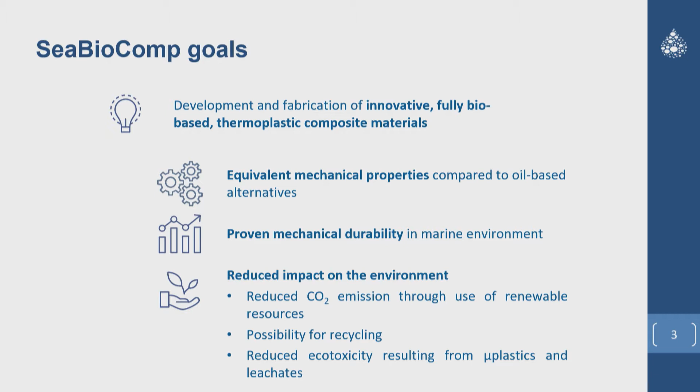Of course, we are also proud to work together with all of you as companies. So one of the goals we would also have is to make some final demonstrators, because we want to really change from a petrol-based chemistry to a bio-based chemistry. I think it's obvious nowadays, if you look at the prices of petroleum and what happens all in the world, we are very dependent on the petroleum industry, and that's something we want to find solutions for, becoming less dependent on oil, but also looking at alternative environmentally safe alternatives for composite materials.

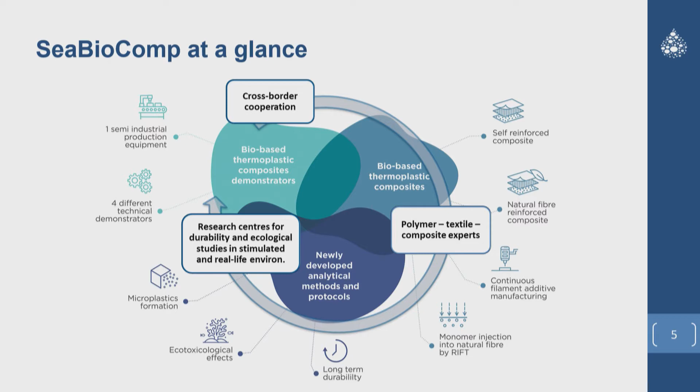This is just very briefly a glimpse of what we have been doing in the project. What you see is different methods of production, but I will not go into details, I will leave this up to my partners to further discuss.

But last, but I think not least, we want to work as much as possible together with you as industrial partners. This is just a warm welcome for all of you, after this workshop, to also reflect on the results and maybe think where in your process, in your product, our solutions could be an answer. So if you have nice ideas for demonstrators that we could also put up in the framework of this project, we are very happy to assist you and make some nice demonstrators.

So keep it open, think about it, and feel free to contact me or one of our partners after this session, and we can have a look what is possible with respect to demonstrators. Here you can find the contact details of me and also of Sarah, our communication manager. All the info is also on the website, so please feel free to contact us if you want.

This very briefly, but I think then we should continue with our real program. I would like to welcome as first speaker of today Chung Hae Park from ARMINES. ARMINES is an association for research and development of industrial processing methods, a private non-profit organization. Professor Chung Hae Park has been responsible in our project for Work Package 1, and we will present you proudly what we have been doing up till now.

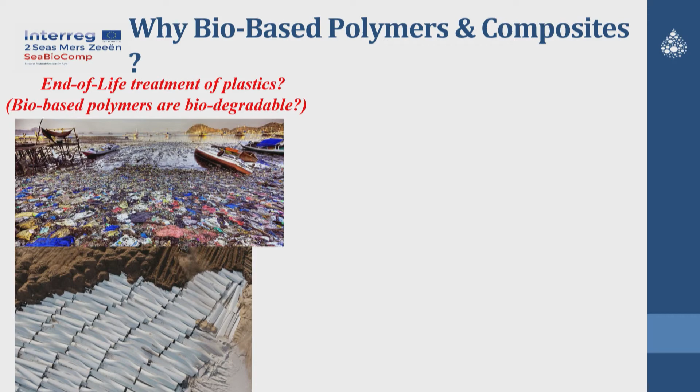So someone might say it could be interesting to introduce bio-based polymer composites, but the question is that not all bio-based materials are biodegradable. Anyhow, another advantage of bio-based materials is that it's a really effective way to reduce carbon footprint and energy consumption, not only during the service life but also during material production itself. If you compare energy consumption and carbon footprint between oil-based and bio-based polymers, you can see the benefit very clearly.

That's why we have developed some bio-based composite materials during this SeaBioComp project. We developed three different kinds of 100% bio-based composites. Our target was to achieve equivalent high performance compared to oil-based polymers and composites, and also easy manufacturing, because sometimes bio-based polymer manufacturing is very tricky.

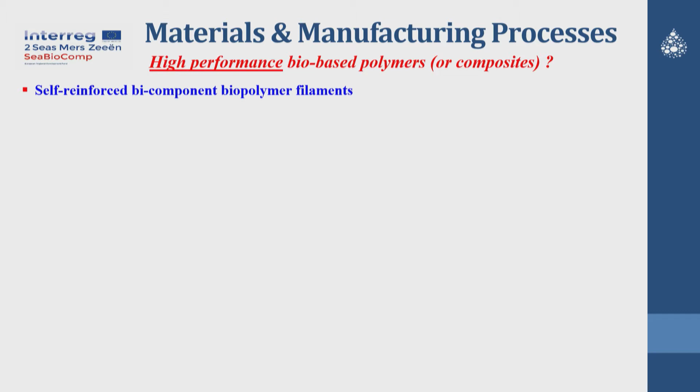The first material we developed was a self-reinforced bicomponent biopolymer filament. The basic concept is that within a single filament we integrate two different biopolymers: outside a low melting temperature biopolymer, and inside a high melting temperature biopolymer, where all the molecules are aligned in the same direction to achieve high mechanical performance. These two materials are combined into a single filament, which is then weaved into a kind of non-woven preform ready for compression molding. This is the first material we developed.

The second material adds a secondary reinforcement such as flax fibers—flax fiber and biopolymers, every component being bio-based. Due to the high stiffness and strength of flax fiber, we can further enhance the mechanical properties. This is a kind of tertiary composite with two kinds of reinforcement at the same time, and we also developed non-woven preforms ready for compression molding.

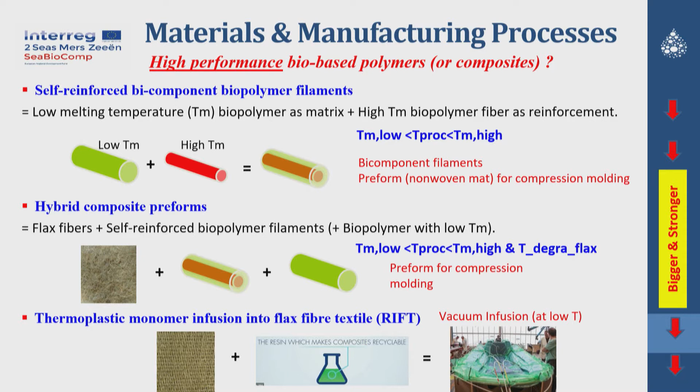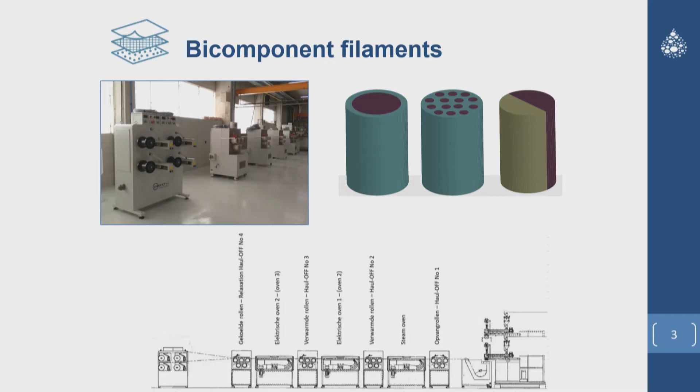For those of you who are not really familiar with filament extrusion, the line goes from right to left. On the right side you have the extruders. Here we have our high melting and low melting PLA grades in our extruders. They go through a die to get the nice core sheath structure. And then we start the production of the filaments.

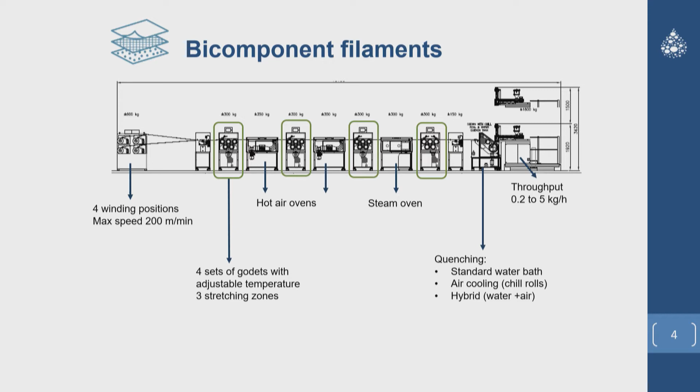They go through a water bath to cool the material. And then we go over different rolls to stretch the material. By stretching it, the polymer chains get aligned, and that gives the reinforcement and the strength of our filaments that we need in the composites.

So we did a lot of tests to optimize the materials. The first thing is that we investigated the effect of moisture. Why do we do that? Because we work with PLA, and it's sensitive to hydrolysis, so you need to have a dry PLA material before you start.

We did a test depending on the moisture content of our PLA, to see what tenacity is achievable. Here we see if you dry up to 50 ppm, which is really dry, you can get a tenacity of 32 centinewton per tex in this case. Using the same parameters, but with a material that's less dry, you see a clear drop of almost 10 centinewton per tex if you don't dry it. So for PLA, it's really necessary to dry it before you start.

So that's one of the main things you need to keep in mind when using this type of bio-based raw material. And then we started with the bicomponent filament extrusion.

There you can also choose to have different core sheath ratios. If you have a core sheath ratio from 33/67 up to the other way around, 67/33, you see that if you have a higher core sheath ratio, so more reinforcement present in your filament, then you have a better tenacity.

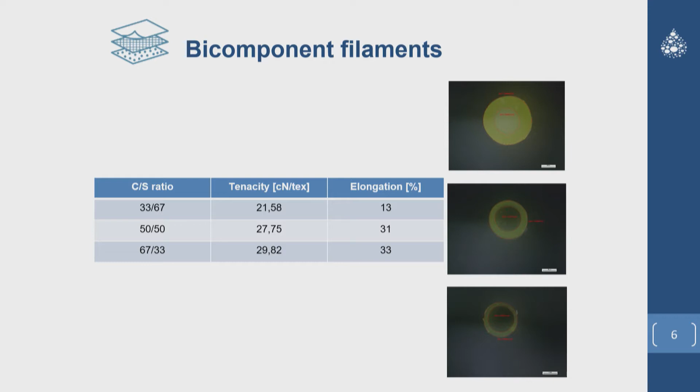You can go as high as 90/10, let's say, but then for the next step, during compression molding, the sheath needs to form the matrix. So if you only have 10%, it's not enough to form a nice continuous matrix. So you need to find an optimum between the tenacity, the strength you need, but also still be able to process it further on.

So all the other results I'm going to show you will be of a 50-50 core sheath ratio, just to start with.

So what we did is during the extrusion, you saw we have ovens, we have a water bath, we have rolls, so we can change lots of parameters. Here you can see what happens if we change the oven temperature, we change the draw ratio, but you can also change the air velocity in the ovens, the water bath temperature.

And so we did this with our PLA, and we did it with lots of different PLA grades. Here you see all the different core sheath combinations, and we optimized them to get the best results.

So you see that the combination of core 1 with sheath number 4 results in the best tenacity and the best elongation. But I want to give some special attention to the third combination. Here we tried using...

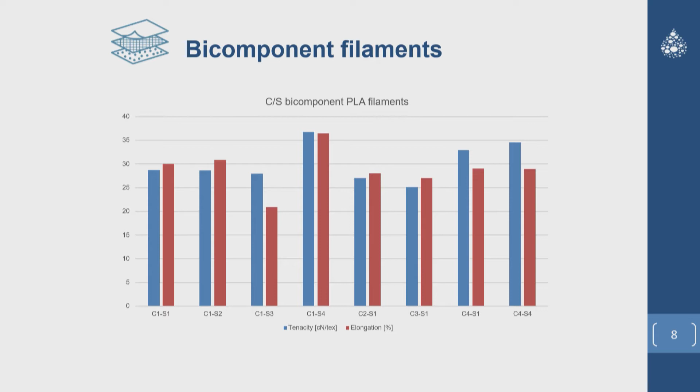But it was more difficult to process them, and if you want to make a composite out of them, you need to make sure you have a temperature window where only your matrix material melts, but not your reinforcement. So a combination of two semicrystalline PLA grades is not really possible for processing into composites. That's why the better results come from a core that's a semicrystalline PLA grade, while the matrix is better as an amorphous PLA grade.

So after improving and optimizing all the parameters and the PLA grades we used, we need to go to the next step, because with just some filaments, it's really difficult to go to a composite. At lab scale, we wind it around a frame, and it's quite easy, but in a production environment, you of course want something easier than manually winding it around a frame.

So the next step is of course to make a fabric. Here you can see them during production. On the left side, you have a picture of a twill 4-4 structure. On the right side, we have more of a unidirectional fabric. It depends on the application you want, whether you want the strength in one direction or you need it in different directions.

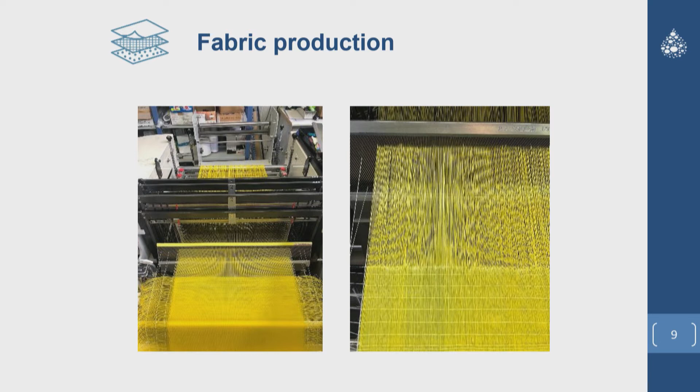You can just take the kind of fabric you prefer, and then you can stack them to optimize the strength in the direction you want. But here we had two main problems.

The first thing is this is quite a difficult filament to work with to produce the fabrics. It was a bit too hard to work with, so we need to optimize it to be smoother to use during weaving.

And the second thing is we made three different fabrics: a twill 2-2, a twill 4-4, and a unidirectional one. With the twill 4-4, we saw that during the first lab trials to make a composite, we had some shrinkage of the material.

And there were two ways to solve it. The first one is to go back to your filaments and include a relaxation step during the processing, so the shrinkage is already less.

A second option is to include a thermofixation step, where we put our fabrics over a frame to fixate them, and then just a small moment, not even a minute, at 80 degrees, and the shrinkage is then way more limited and easier to work with.

And that's how we get to the self-reinforced fabrics, so we can use them as a preform to make a composite. Thank you for your attention.

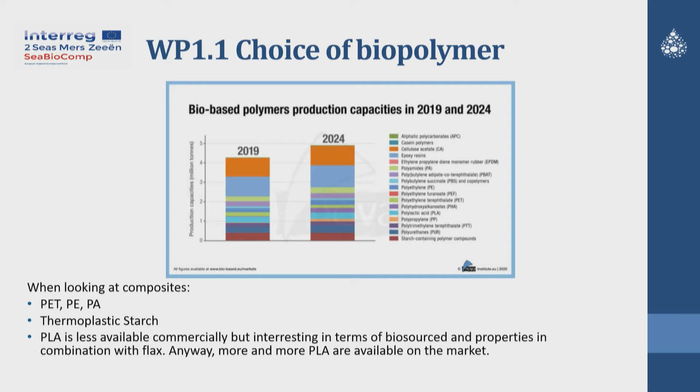PLA, even for non-woven. For non-woven, polyamide and polyester could be a problem due to temperature and degradation of natural fiber, of course. But as we have developed many things, I will go through.

First of all, melt spinning tests, of course. So I put some results about different polymers. For those who were here, they have seen the melt spinning line - a 3-component melt spinning line, which allows us to make different cross sections, different mixing of components, up to 3 components mixing.

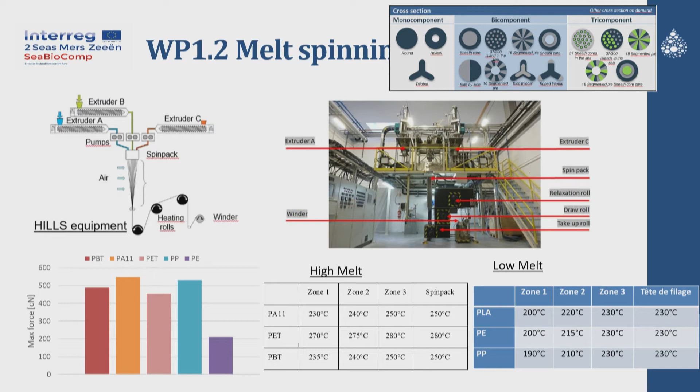So there, firstly, we tested several polymers which could be biosourced or not. What's coming out from this study in melt spinning is polyamide 11. If we talk about melt polymer, polyamide 11 could be the best solution in terms of tenacity. And PLA was quite difficult to process.

But PLA, of course, is quite compatible with natural fiber, so you will see after that in a different process it will be better.

We focused first on high melt and low melt, but after making this study, we tried to mix different polymers which can be considered as high melt or low melt polymers.

So we tried different ratios, 40-60, 60-40. You have the results here in terms of tenacity and elongation. It's complex graphics, of course, but you can see the tendency.

So we tried core-sheath/islands-in-the-sea structure in melt spinning, and what appears from this study is firstly PA11 with bio-PBS seems to be one of the most appropriate couple of polymers. But not only that - what we have also seen is quite a difference in the structure.

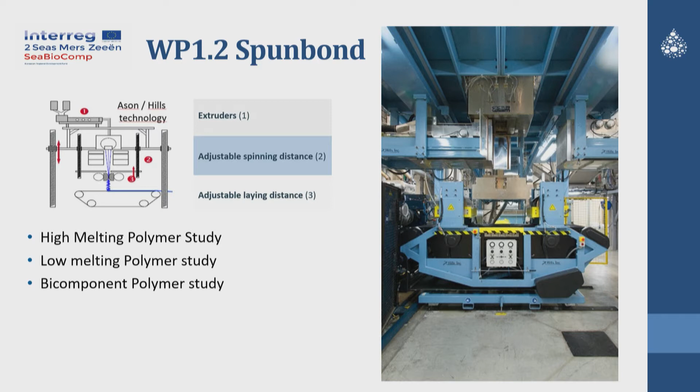And we have done the same study as in melt spinning - we tried to study high melt, low melt, and bi-component structures with the same strategy. First we tried, without going through all the study, high melt and low melt, and developed a first grade considering polyester as high melt and PLA as low melt, because there are different temperatures. You have the results here.

What we observe is that PLA chemistry could play a role, because you see two different PLAs used, 6202 and 6100, and you see clearly there are some differences in tenacity, in normalized strength. We normalize strength by testing in both directions of the non-woven, so we clearly see the strength of the whole non-woven. This is the goal of normalized strength, and we clearly see that PLA chemical structure could play a role there.

So we try to complexify the study a little bit, because we move to several different couples using PLA high melt, polyester, PLA low melt, and try to combine everything. So you have all the results here. We try different cross-sections also, sheath-core and islands in the sea. But you could see also the tendency.

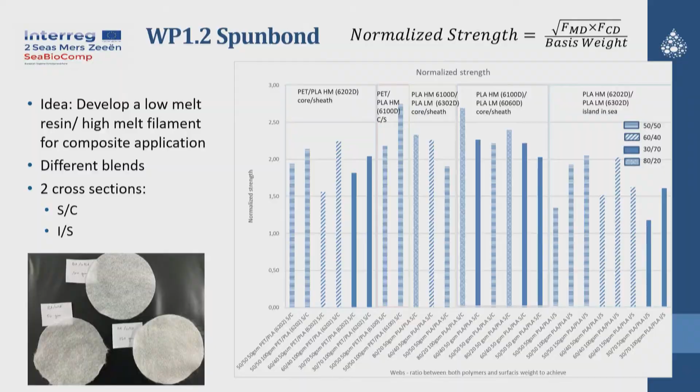So now we move again to another part, which was task 1.3. Then we try to implement also - before you have high melt, low melt. High melt is a reinforcing fiber, low melt is a resin, of course, and we try to implement natural fiber inside. So we use another strategy, which is carded non-woven.

So we try first to choose the best fiber. So you have here the composition of natural fibers, and if I could compare natural fibers to something, I would definitely compare it to composites. So telling that cellulose is the fiber, hemicellulose is the link between fiber and resin, and pectin, lignin or wax could play the role of resin. So if you consider this as a composite, you will see that more bond you have, or more fiber you are, stronger is the composite. So it's the same in natural fibers.

So if we have a look at properties, you will see clearly that the fiber which has the most cellulose or more hemicellulose are the stronger fibers - so flax, hemp, and at the second level, jute or kenaf. So that's why we choose flax, of course, as the natural fiber for hybrid textile used for composite.

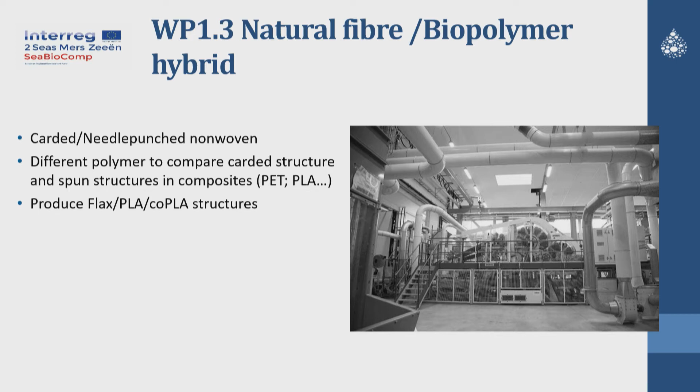But we try also flax PLA and co-PLA mix to deliver for composites. But here what we will see is not composite results, but textile results. So we could see already what is available on the textile. So it's always the normalized strength here, and we clearly see that a good ratio of fiber is 60% PLA and 40% flax.

But with the results that we have developed also with ARMINES, we have seen that we have to add other components, such as low melt composition, that could play a role in elongation. So that's why we try to manage also elongation - not us, but ARMINES tried to add some low melt fiber, low melt components to add elongation without disturbing the tensile strength in composites. Here it's always on textile. So we try, that's why you have this table, to manage the good ratio of fibers and flax.

I will go quickly on another part of textile composites, which is just reinforced polymer. So we try to manage also short reinforced fiber compound or long fiber reinforced filaments.

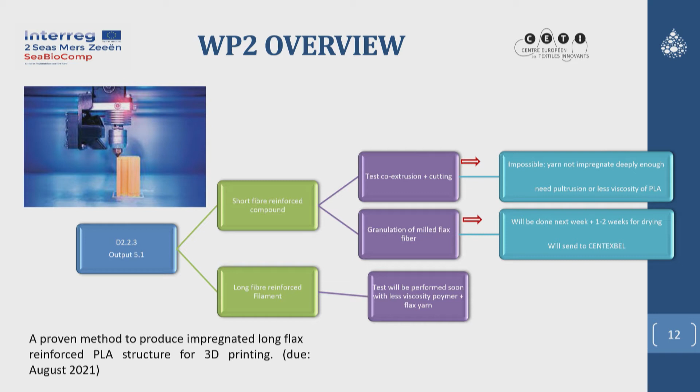So what we do is co-extrusion into a 3-melt spinning line, just to make a filament that will be available here. I will try to share with the assistance to show you spun bond, what is a carded non-woven, what is a filament. So we do a co-extruded yarn coming with a yarn from Safilin. We thank Safilin for helping us on that.

And we coated the yarn with the PLA to try to make compounds or to directly make 3D printing, but unfortunately, the limitation was a low pressure, so we were not able to commingle very deeply PLA in flax. So the cutting was a disaster, and I believe 3D printing will also be a disaster.

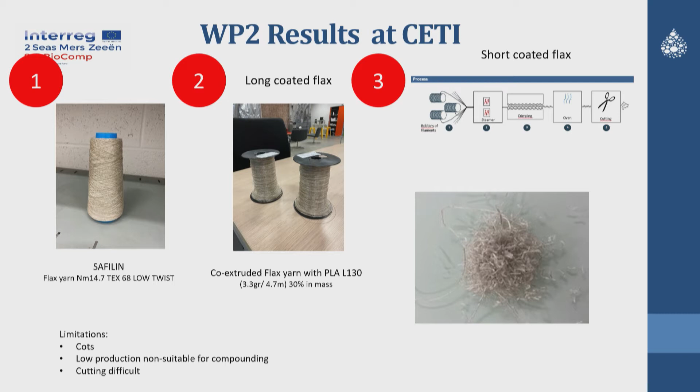So we tried to move to another solution, which was to granulate flax fibers so it could be very dosable into a compounding line and try to mix directly with the PLA.

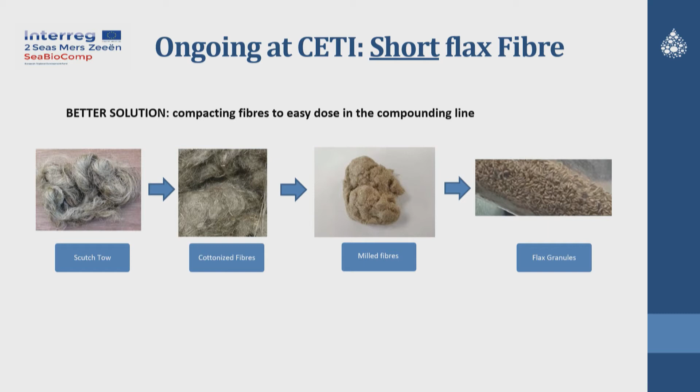Just a short introduction on what is going on now. We try to manage also recycling through different axes, because the spun bond is made of synthetic fibers and the carded non-woven is made of fibers. So we try both routes, which was mechanical recycling and thermomechanical recycling, and the tests are ongoing now.

Just I was expecting to have some questions, but we will see after. So I thank you for your attention, and we will see after for the questions.

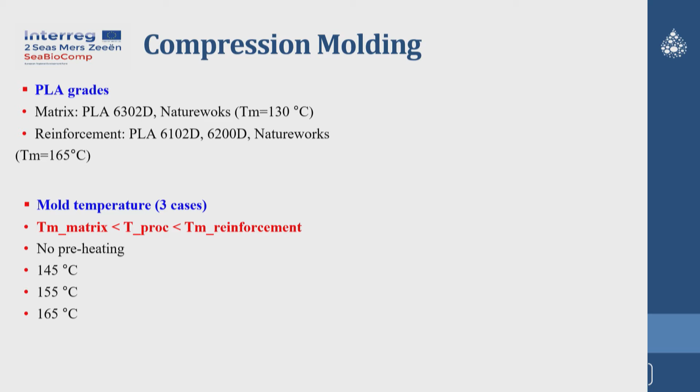Moreover, what was interesting in this project was that all these preforms didn't need preheating or pre-drying. So manufacturing is relatively easy because we didn't need pre-treatment of the material.

In terms of compression pressure, we adopted a kind of staged compaction — starting from low pressure and increasing the compression pressure sequentially, because in compression molding one common problem is excessive lateral squeeze flow, which can cause loss of a lot of matrix material. Anyhow, we also tested the conventional compaction cycle with constant pressure, and it works too.

The first material we tested is self-reinforced PLA. We tested two different kinds of filament with two different cross-sections. The first one is core and sheath, shown on the top left figure. The second one is islands in the sea, where very small, high-melt PLA is embedded in low-melt PLA.

As a second comparison, we looked at two different non-woven technologies, dry-laid and spun-bond. So we compared the two cross-sections and the two non-woven technologies. According to temperature, you can see the results: flexural modulus on the left graph, flexural strength in the middle graph, and on the right, the failure strain.

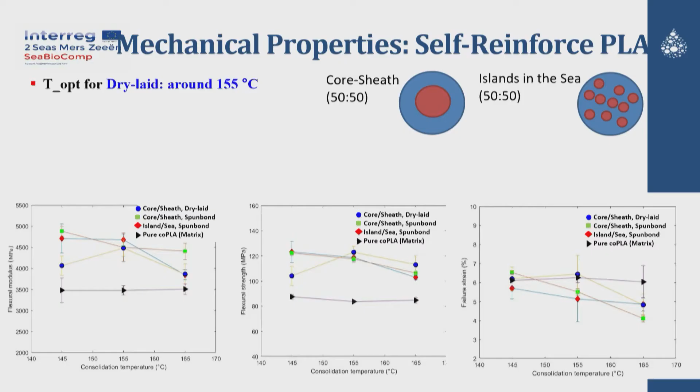And moreover, the optimal temperature was around 145 to 155 degrees.

You know that the most common composite material for compression molding is sheet molding compound, based on glass fiber and unsaturated polyester. For this SMC material, the processing mold temperature is around 150 — exactly the same processing temperature. That means you can use the same equipment and the same mold for this material.

In terms of comparing the two different nonwoven technologies, we found that spunbond is a little bit better because the process window was a little bit wider. We observed no difference between core-sheath and island-in-the-sea. So anyhow, we could increase modulus and strength without compromising failure strain and ductility. So we could obtain stiff material, strength material, and at the same time it is also ductile.

If we tested, the flax-PLA-coPLA composite is a kind of tertiary composite. We have two reinforcements in the same material. Flax is the first reinforcement and PLA is the second reinforcement, and coPLA is the matrix material. And maybe you can ask, why do we add the secondary reinforcement?

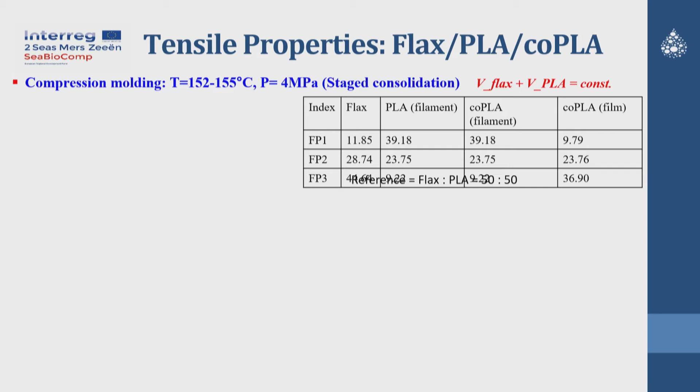So we compared. We keep the same amount in terms of volume, flax plus PLA, and we change the relative ratio between flax and PLA. In this table you can see FP1, 2, 3. In all these cases, flax plus PLA volume fraction was 50%. In this table we showed the mass fraction. And we compared mechanical properties.

You can see on the left graph, the left 3 dots are the results of flax, PLA, and coPLA. On the right, the first dot represents the result of a flax and PLA composite, where PLA in this case is the matrix. So maybe you can find some commercial grade flax-PLA composite in the market. You can see that compared with the conventional flax-PLA composite, we could increase modulus and strength, and we could almost obtain the same tensile failure strain.

So the result shows that with just a small amount of self-reinforced PLA, we can greatly enhance the mechanical properties. We can conclude this kind of tertiary composite is better than the binary composite of flax and PLA. And if we measure the flexural properties, we could obtain almost the same conclusion.

Especially you can see the third graph. The first 3 dots are flax, PLA, and coPLA, and the last, 4th dot, represents the result of flax and PLA. We could improve greatly the ductility because we added a small amount of PLA reinforcement. This contributes greatly to enhance the ductility of the material.

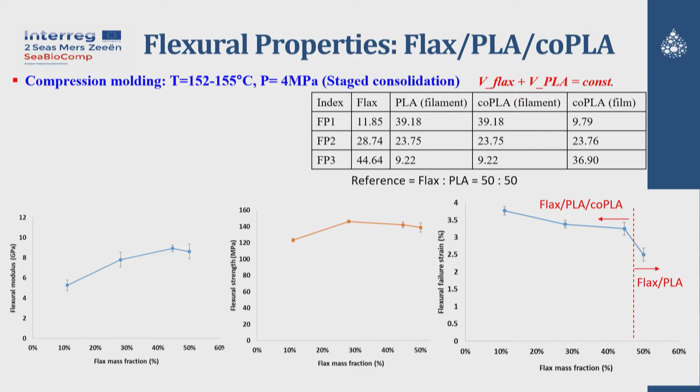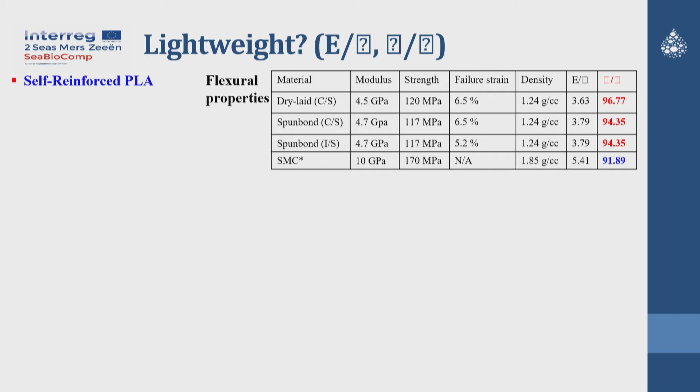And if we take a look at the result of flax, PLA, and coPLA, you can see that specific strength and specific stiffness, both tensile and flexural properties, we could increase greatly specific modulus and specific strength. That means if we employ these flax and coPLA materials, we could reduce up to 50% of structural weight compared with conventional SMC. So this is a really big advantage. We can use bio-based composite, we can reduce the carbon footprint, and we can decrease the structural weight.

And the question is about manufacturing feasibility, especially for complex part molding. In general, the big challenge of compression molding is to manufacture with a deep draft angle with a corner, where we can frequently observe wrinkles and low pressure applying applications.

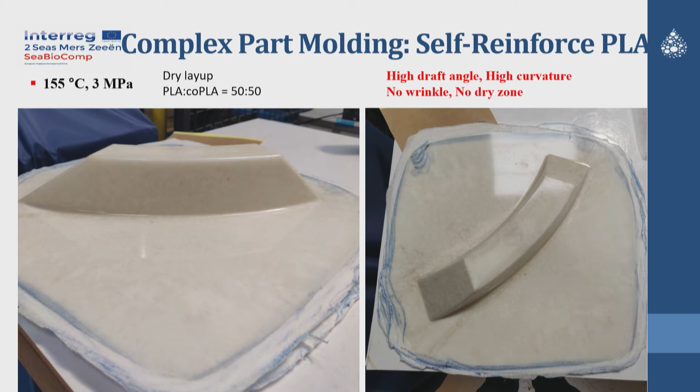This is the result of compression molding using the self-reinforced PLA, the nonwoven prepared by the dry-laid process. You can see there is no dry zone, no visible void, and no wrinkle. So manufacturing was quite simple. We just used the same mold and same compression molding press as for SMC manufacturing, and you can see the temperature range and pressure range were exactly the same as the SMC compression molding. Also for flax, PLA, and coPLA, you can observe the difference in color due to the flax fibers.

So anyhow, without any special treatment or pre-processing, no wrinkle and no dry zone, we could obtain perfect manufacturing quality using this process and materials. So we can say that we developed two different kinds of 100% bio-based composite preforms compared with the conventional SMC.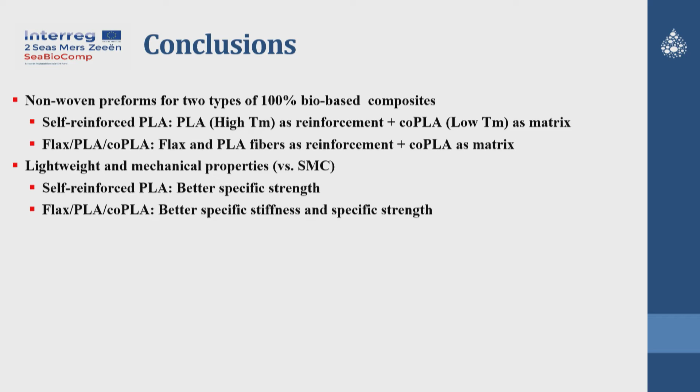We could obtain significant weight reduction, and we can use the same equipment and same mold as for SMC. We don't have to develop a new mold or new manufacturing equipment. The manufacturing cycle time is a little bit longer than conventional SMC compression molding, but nevertheless much shorter than vacuum infusion and VE-RTM.

Due to the proximity between reinforcement and matrix, because we implement the matrix and reinforcement in the same filament, the impregnation path was relatively short, and we could obtain excellent impregnation quality. Void volume fraction was lower than 2%, which is almost aeronautic part grade.

In terms of drapability, we obtained no wrinkle formation, so this non-woven preform has excellent drapability. We are expecting, though we haven't tested yet, that this kind of non-woven preform will have excellent impact resistance because it has good ductility and good toughness.

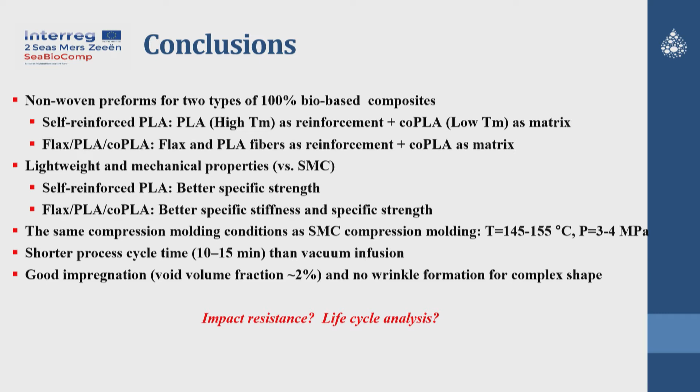And we are supposed to do some life cycle analysis to prove that this material can really reduce the carbon footprint eventually. So thank you very much for your patience.

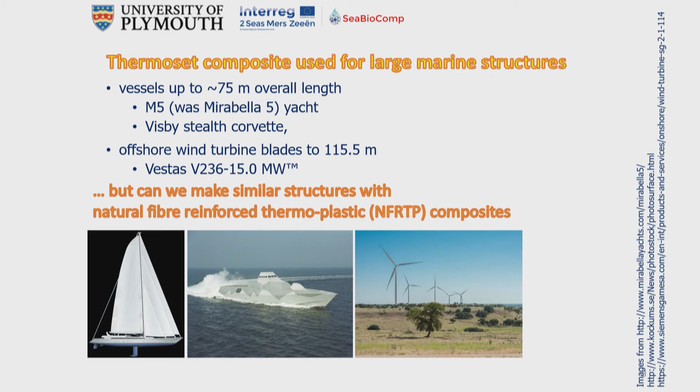This is the project that we're based within. Fundamentally, there are some big composite structures out there, things like M5, the luxury yacht, the Visby stealth corvettes, and offshore wind turbine blades, which are of the order of 75 metres for the ships and 115 metres for the wind turbine blades. Processing thermoplastics at that scale is not trivial. So can we make similar structures using a thermoplastic matrix?

It's certainly not something you're going to build a compression mould to do. Why would we want to do that? Because we're trying to make a sustainable composite. There are all the advantages we get from natural fibres and some disadvantages. And if we have a thermoplastic matrix, then it becomes recyclable and we have the potential for high impact resistance.

So in resin infusion under flexible tooling, also known as SCRIMP, VARTM, and about 50 other different abbreviations, we make a stack of fibres, cover it with release film, add a flow medium above that, and then close it in a bag. Then we flow the resin, which becomes a thermoset matrix, into the mesh to produce the composite by drawing a vacuum into the bag and allowing resin to flow down the pressure gradient.

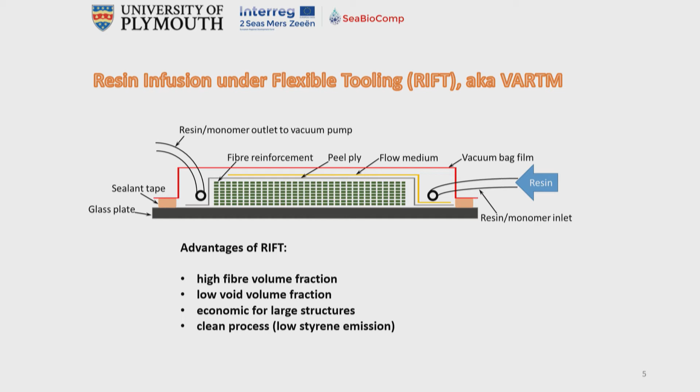The advantages of RIFT are we get a high fibre volume fraction, a low void volume fraction. It's economic for large structures, whereas trying to make a mould tool and keep it together for resin transfer moulding would be extraordinarily expensive. And it's a clean process compared to hand lamination, which has been used for some of the largest structures in the past, because it encloses styrene in the bag, if we're trying to do it with unsaturated polyester resin.

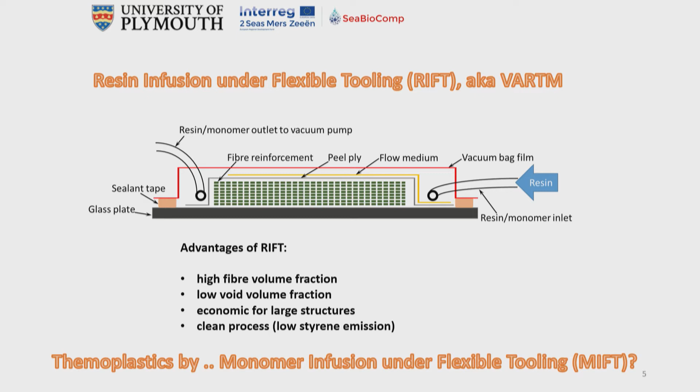But thermoplastics, the melt viscosity is far too high to get it to flow in an infusion process. But if we start from the monomer and make the polymer at the same time as we make the composite, we can potentially do monomer infusion under flexible tooling.

In order to do that, we need to pick a monomer that suits a variety of characteristics. It needs to be liquid at the temperatures that we want it to flow. The viscosity has to be suitable for infusion. If it's too low, you tend to trap air. If it's too high, it doesn't get to the end of the product.

The process temperature, because we want to use natural fibres, needs to be below 200 degrees centigrade. The use temperature ideally will be below glass transition temperature for ease of design. And if we're going to put it in the marine environment, we want a low moisture uptake because moisture drops the glass transition temperature.

There are also desirable characteristics in the context of the SeaBioComp project: that it be a bio-based monomer, that the process time is long enough to make large structures, that it's a sensible cost per kilogram, that there is low embodied energy and low environmental burdens, and it's recyclable. So we set ourselves quite a demanding series of constraints in order to make sustainable infused marine composites.

We looked at the paper by van Rijswijk and Bersee, who suggested there's a whole variety of polymers that we might use, but some of them don't meet the criteria we're aiming for. So the reds here process too hot. Some of them have got too high a viscosity. Reds in column 4 process too hot.

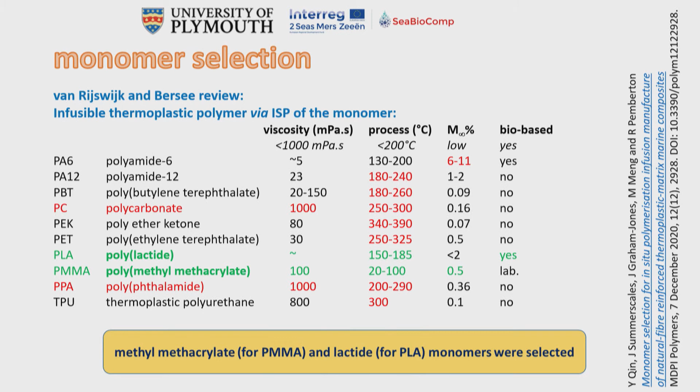In column 5, we end up with a very limited number of possibilities because of the moisture uptake. And then, is it bio-based or not? Well, we end up with polylactide, but it's got a high process temperature, or methyl methacrylate.

One of the issues we had was temperature uniformity across the mold tool. So we found that using a glass plate between the heaters and the mold tool spread the heat more uniformly and gave us flow that was closer to what we expected.

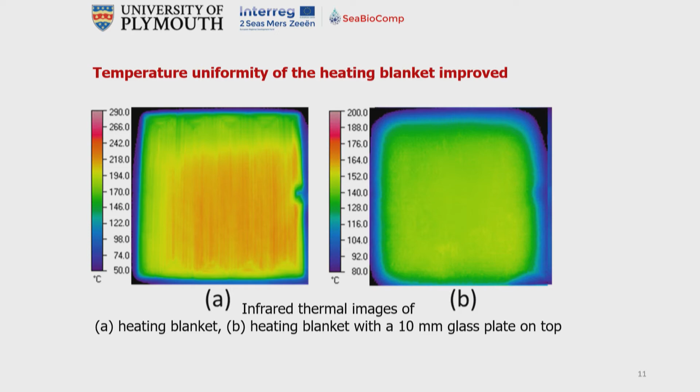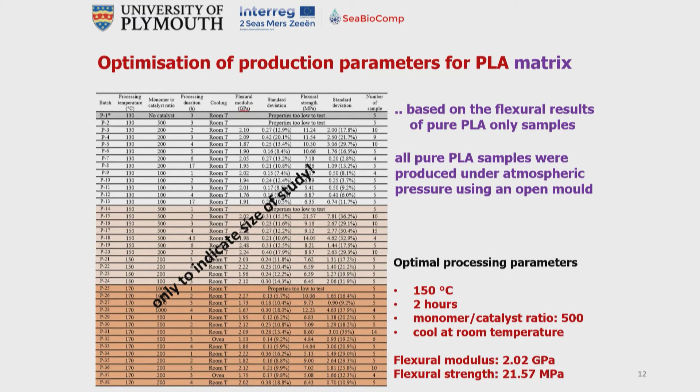Based on flexural results, all samples were produced under atmospheric pressure using an open mould for the PLA, because we can't infuse the PLA quite the same way as we can infuse the composite. We identified optimal processing parameters of 150 degrees centigrade for a couple of hours, monomer catalyst ratio of 500 to 1, and cool to room temperature. We got properties that look reasonable, not special, for a polymer.

We then made some composites with the flax PLA and with the Elium and got these mechanical properties. At this point, I'm desperate to use the pointer and it doesn't work for those people online or in the room. But the top line is flax PLA, and the experimental strength only comes out at 60%, and the experimental modulus only comes out at 37%. For the Elium acrylic, we're getting sensible strengths as we would predict, but again, the flexural modulus is low.

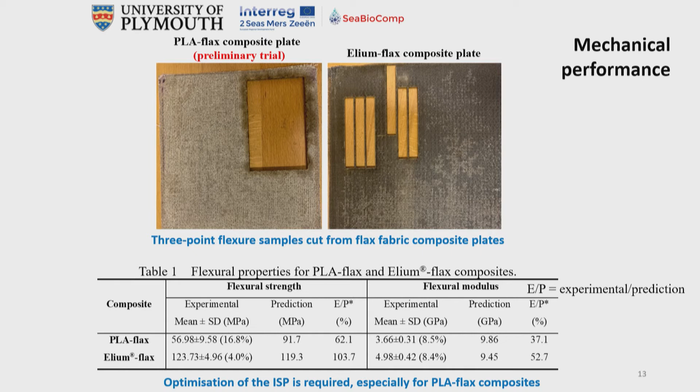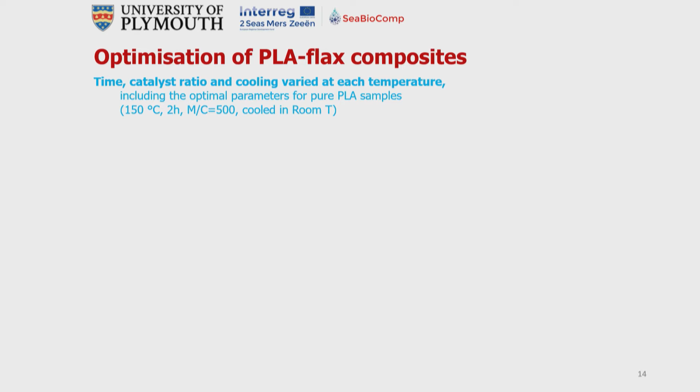So we need optimization of the in situ polymerization, especially for the flax PLA composites. We looked at the optimization, varying time, catalyst ratio, and cooling at each temperature, including optimal parameters for pure PLA, and identified that 150 degrees with a catalyst ratio of 500 gave the lowest modulus and the lowest strength.

So there are differences in the air that's affecting the process somehow. Again, the numbers we've been given previously were the lowest interlaminar shear strengths, indicating that the fibre to matrix interface is weak. So the optimal parameters for casting resin are not the optimal parameters for making the composite.

The flax PLA matrix samples in the highest temperature batch showed the best properties, which is really bad news because tooling options start to fall away quickly once you go to higher temperature. And the properties of the PLA matrix composites, as predicted, are still not good and give a very low interlaminar shear strength. It's interesting that a professor at Bristol, who's done a lot of work with natural materials, is also commonly now saying that PLA is not a good matrix for composites in many cases.

The optimal parameters don't give the best mechanical properties. Why? Well, the flax fabrics may affect the in situ polymerization of the lactide monomer. At the temperatures we're working at, the fibre should be dry, but maybe there is some residual moisture. Pure PLA samples were produced without vacuum, while the composite samples were produced under vacuum, because that's the nature of the infusion process. We think there may be a polymerization-depolymerization equilibrium around the process temperature we've been using, and lactide may boil at the flow front under vacuum, with volatile losses affecting the properties.

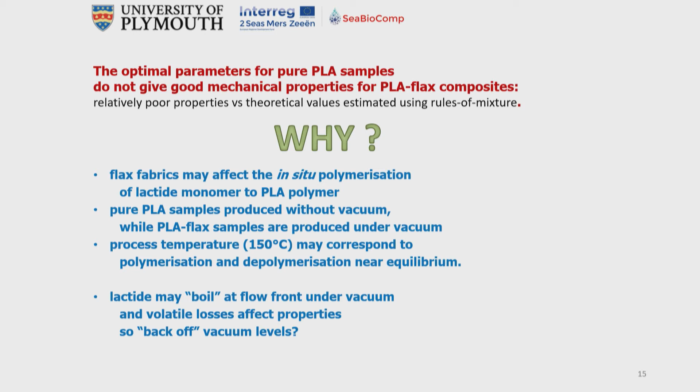So we looked at backing off the vacuum levels, and it does look like lower vacuum produces better properties. We tend to pull the best vacuum we sensibly can when doing thermoset resins, and that may not be the best option for our PLA composites. This particular set of tests showed no significant differences in laminate thickness dictated by the pre-infusion pressures.

Some issues here - if you want to know the personal story, it's a long one, but it wasn't possible to complete the full series of tests. Again, low properties implying weak bonding. So, can we make things? We need to move forward. Where are we going next?

Thermal analysis - our instrumentation died and it's taken forever to reinstall the new system. Beautiful new system, but problems with pipework. The 3D demonstrator is pending a mold tool design and commissioning, and life cycle assessment is in the future.

So for the 3D demonstrator, we made a flax Elium wind turbine blade at 1.25 meters length as a demonstrator, but didn't have the system to do the flax PLA version. We're expecting the mold tool for the 3D demonstrator, which is a 5G telecommunications system housing to go on marine buoys to provide mobile phone and data connectivity at sea. It fits in a meter cube, sensibly, but it needs the heating of the mold tool.

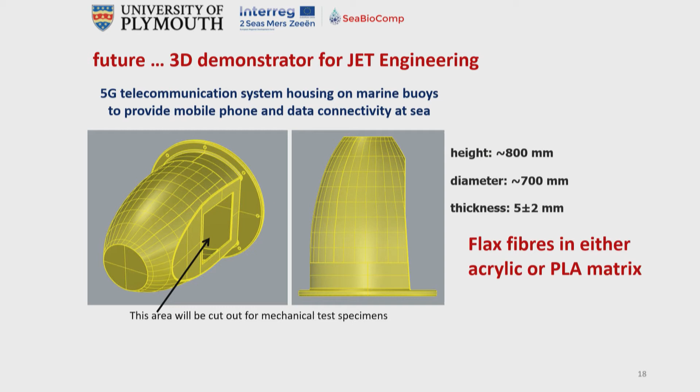We'll do that in flax fibres in either acrylic or PLA, and probably with a thermoset matrix as well to demonstrate how it compares, but we do need the heated tooling.

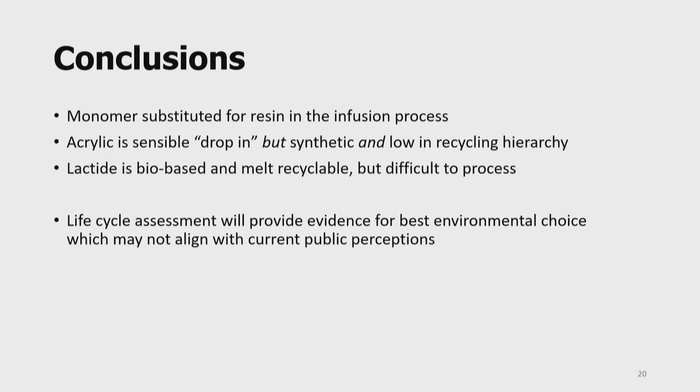So in conclusion, the monomer substitute for resin in the infusion process - we can get to work. Acrylic is a sensible drop-in, but it's synthetic at the moment and low in the recycling hierarchy. The lactide is bio-based and melt recyclable, but relatively difficult to process. Life cycle assessment may provide evidence for best environmental performance, which may not align with current public perceptions.

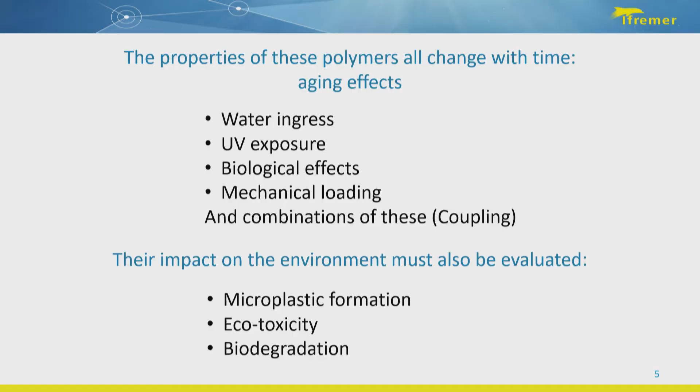We have seawater aging tanks at different temperatures. They're continuously renewed to try and avoid some of the biological effects, and we monitor them continuously. Essentially, we put samples in and look at their weight gain, which gives us an indication of how quickly water diffuses into the materials.

This is one of the difficulties - these tests are long, so within the project we had to start our aging very early, beginning with one of the original materials. What Mylène will talk about in a minute is some results from some of the original self-reinforced PLA, which was available at the start of the project.

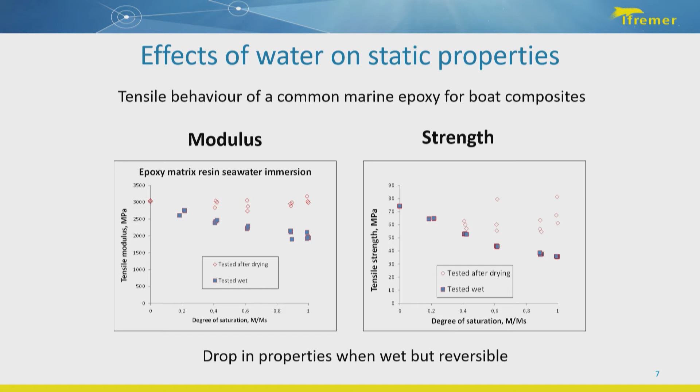And it's also not a lot of comfort if your material is left all the time in the water, to know that if you took it out, you could get some of the properties back. So that was the short-term properties.

Just an example of what happens for long-term properties. This is not easy to describe without a pointer, but what we've done is creep recovery tests on an epoxy material. We did them first dry, so those are the square, rectangular blocks showing the stress. We increase in stress for an hour and then unload for 3 hours. Then the colored lines are tests done after aging to different degrees of water ingress.

The first one is after 55 days in water at 25 degrees, and the last one is after a year and a half. Here we can see at low loads a pretty elastic behavior, but gradually as we increase the loading rate, we get more viscous behavior, creep. The creep response, which in the last column is the red dashed line when we have no water in the material, has gone to the green line when it's been in the water for a year and a half. So the viscous behavior is strongly dependent on the water in the material.

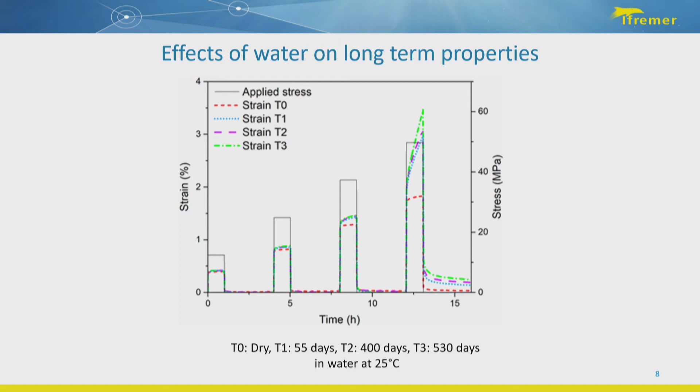So that's another effect which you have to consider, if you're looking for a long-term application, this could be the critical loading case, and you have to try and predict that as well. So how do we do that? Well, for that, I'll pass you over to Mylene.

Thank you, Peter. So to include the environmental parameters in a predictive framework, there are several approaches. In the lab, we use 3 of them. So the first one is a mechanistic approach.

This approach needs a deep understanding of the chemistry of the material, so it's quite complicated, but it can be done. Another one is a fully coupled approach. You have seen on the previous slide with Peter that there are a lot of different possibilities of coupling for aging. So in that approach, we try to combine all of them depending on the application, to really predict with a good understanding of the application.

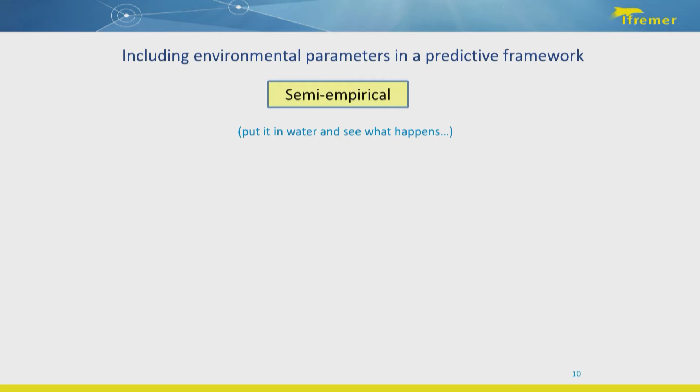And in the project, we have used the semi-empirical approach. I will explain a little bit more. Basically, we put the samples in water, in seawater, and see what happens.

To give you a little bit more understanding, we do a first step. The samples are immersed in natural seawater, and we do a gravimetry test, weighing the samples regularly. This gives us a weight gain, which helps us model the water diffusion kinetics. This gives the water profile in the structure, which is absolutely necessary when you want to do a prediction.

Another step is to test the different properties of the material, the mechanical, chemical, and physical properties, at long time, during aging.

With all these results from the different characterizations, we try to correlate all the results together to understand what's happening in the material over a long time in the sea. Then, once we have this understanding of the change in the material, we correlate these results with the moisture content, with the water diffusion, mixing the two steps together in order to have a prediction.

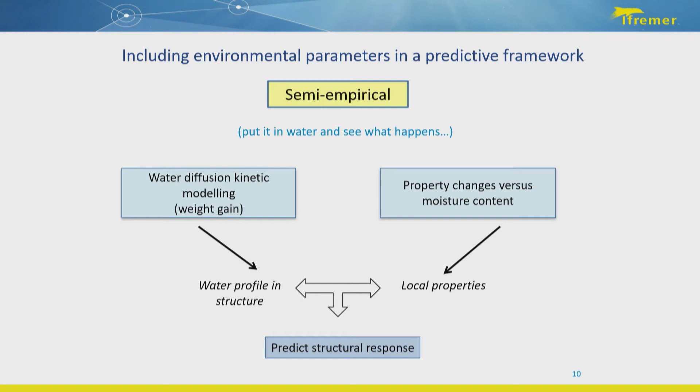PLA is a really good candidate when we are talking about bio-based material, because it's bio-based first, it's recyclable, but one of the problems is that the bulk polymer tends to be brittle, and this can be a big issue for marine structures. So one of the ideas was to do self-reinforced PLA, using the properties of high elongation of the fibers in order to improve ductility.

So here you can see different graphs. On the first graph, on top, you have the weight gain as a function of the square root of time. We used this scale due to the diffusion law. What we did is immerse samples at different temperatures in natural seawater, from 4 degrees, the temperature in deep sea, up to 80 degrees C, with a lot of different temperatures in between, to perform accelerated aging tests. As Peter has shown you before, it's necessary to perform accelerated aging tests to understand the behavior of the material in the long term.

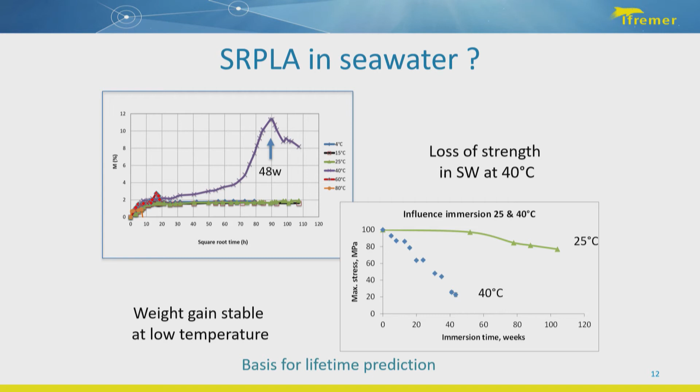At the opposite, for 25 degrees C, the tensile stress properties stayed quite stable, even after 2 years of immersion. So this was the basis for the lifetime prediction.

In the same way, natural fiber composites have also been tested in the project. One of the problems with this material is that the fiber is very sensitive to water - the question was asked before. When you immerse samples like that, the sides, the edges of the samples, are cut, which means the fiber is directly in contact with water, which is very severe. And of course that's not occurring when the material is used in the actual application.

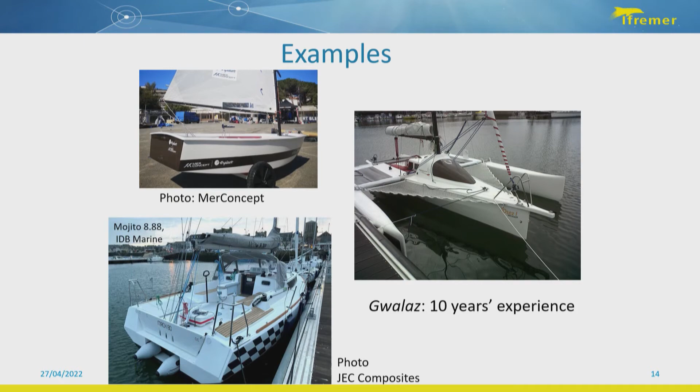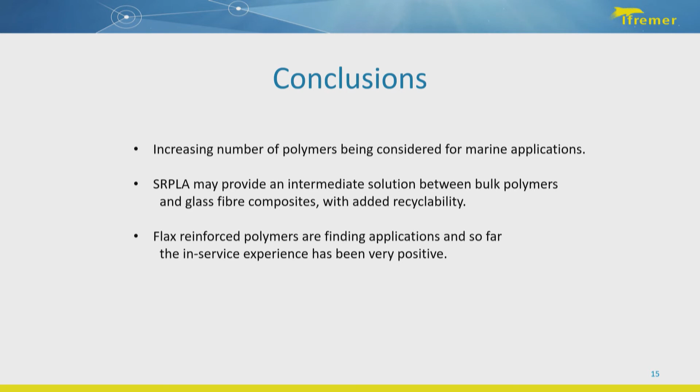So to conclude this presentation, there are more and more polymers and composites that can be considered for marine applications, particularly bio-based materials, and those materials are really interesting. As an example, self-reinforced PLA may provide an intermediate solution, since its properties are between the bulk polymers - which we've seen have been improved - and the glass fiber composites. And of course there's the advantage of recyclability here. For flax reinforced polymers, they are already in use in marine environments, and the experience is very positive about them. So thank you.

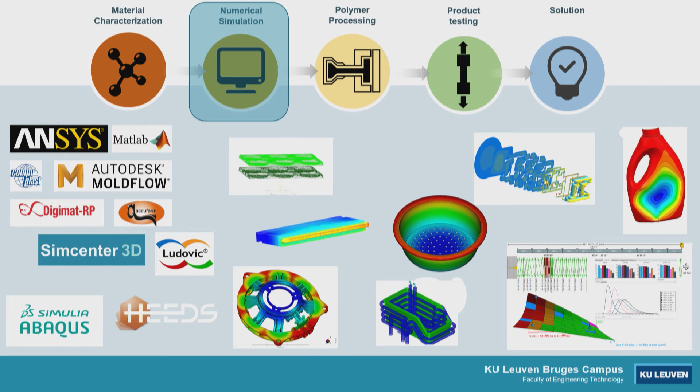So numerical simulation is the second part of main focus in the research group. And then the last part is also to compare numerical simulation results with real processes. We have quite some equipment available in the labs which are highly instrumented, really to be able to measure which temperatures and pressures are present inside the mold. In fact, I'm less interested in the product which is realized, but I really want to compare it with what type of prediction we have, and does it correlate well? And of course, engineering work starts if it does not correlate - why do we have something different measured than which was predicted? So we do this for compounding, injection molding, and extrusion.

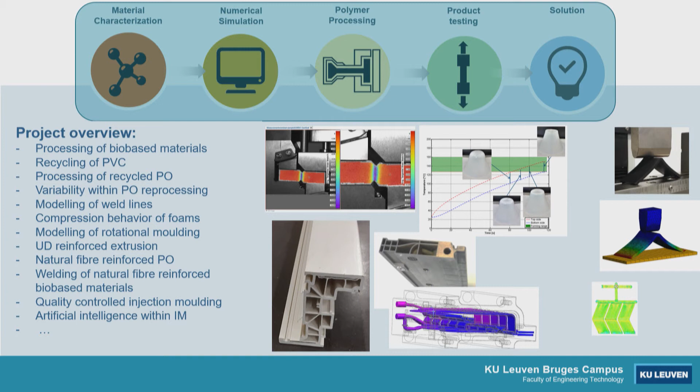Okay, so just an overview of different projects which are going on. We are not only dealing with bio-based materials, but as I am a mechanical engineer, we try to understand the whole thing of processing of bio-based materials, recycling of PVC materials, recycled polyolefins, also all other types of polymer processing are investigated. So, but main focus is on thermoplastic materials.

If we have a look at some history about biocomposites at KU Leuven-Bruges campus, we are mainly focusing on short natural fiber thermoplastic composites through injection molding, as I also have colleagues in Leuven itself. Professor Ignace Verpoest is maybe well known in this consortium. Of course, he already retired, but he's still active in the field of natural fiber composites.

So he already has maybe 30 years experience in processing long fiber, natural fiber composites. So we have some subdivision there. At Heverlee, Aart Van Vuure, together with Jan Ivens, they are focusing on long fiber reinforced materials. We are focusing on short fiber reinforced materials.

In 2011, we had a coordinated project in which Centexbel was also involved, this FlaxPlus project, in which we tried to put short flax fibers into a polyolefin matrix, to see how this can bring some extra material properties.

Later on, there was this ValorFlax project, to commercialize this type of compound which was developed, because a kind of market push is difficult. You can show a company we have some nice material, show them some tensile bars, but people will not buy this or use this material, and for sure not if there is variability in properties. And polymer processing companies are kind of addicted to their initial materials.

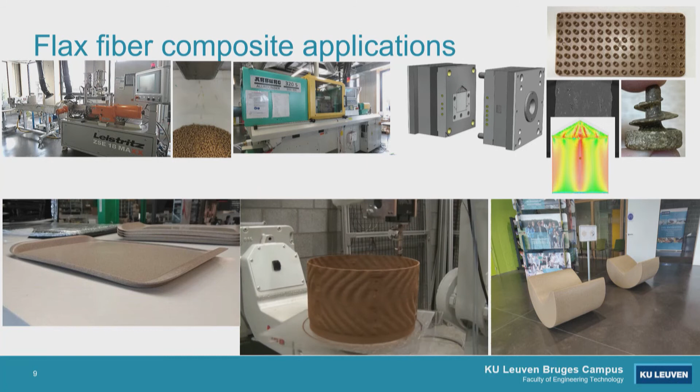Another process which is used is rotational molding, but this is still a polyethylene flax fiber reinforced chair, so it's kind of a design part. To be honest, the contribution of the flax fibers here is not too high for the mechanical performance, it's more a visual effect. It has a kind of soft touch, jeans feeling, and that's the argument to sell this type of chair.

Okay, so what's the whole thing? Of course, to generate this compound, we have the matrix, starting from this polyethylene or polyolefins, and we add these cut fibers. So to cut these flax fibers into a controlled length and get it nicely compounded is really the main challenge. Cutting is challenging, and dosing is challenging too, because cutting this natural fiber causes a lot of wear on the knives and makes it hard to cut in a controlled way.

And of course, we also have some contradictions: limited processing temperatures due to the natural fibers result in high pressure. But some nice applications are there, like small boxes for transportation solutions, and even housings for fan applications. Even some thermoforming was also possible with these natural fiber reinforced materials.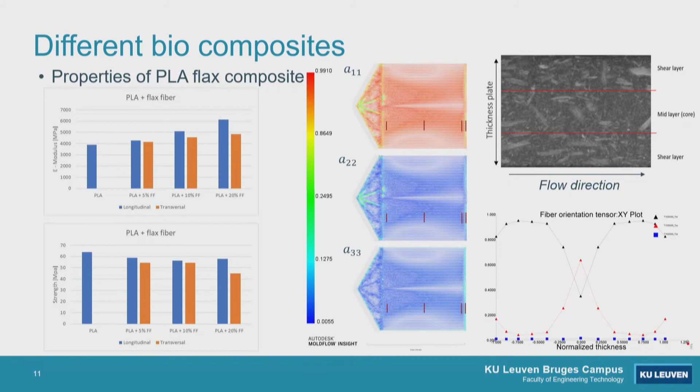So that's the PLA flax composites. Later on I will compare all of them. So that's the first one in the comparison.

Before we go to the second one, another type of work done in our research group within the framework of the SeaBioComp Interreg project is to model the whole behavior of a natural fiber reinforced material. This is now using an adhesive, just to see what type of stresses are occurring, taking into account the local fiber orientation - not assuming homogeneous properties of the two materials, but seeing how these stresses develop in the whole joint.

Of course, towards the end of the parts which are glued together, you have some higher stresses. But in this case, we also take into account the local orientation of the materials being joined. This can also be done as soon as we have an idea from the laser welding done in the research group of Professor Park - then stresses can be calculated there too.

Okay, if we look at these sisal fibers used to reinforce our PLA, first some measurements were done on the strength of these fibers. This was done using DIC in the research group of Aart Van Vuure in Leuven. They did single fiber testing to find the potential of this type of fiber. That's the PhD work of Eshetie Kassegn.

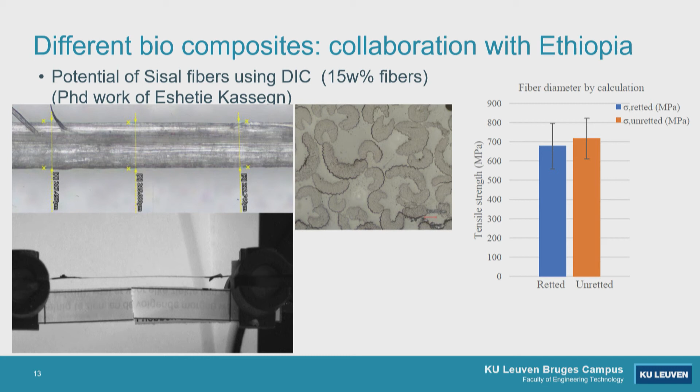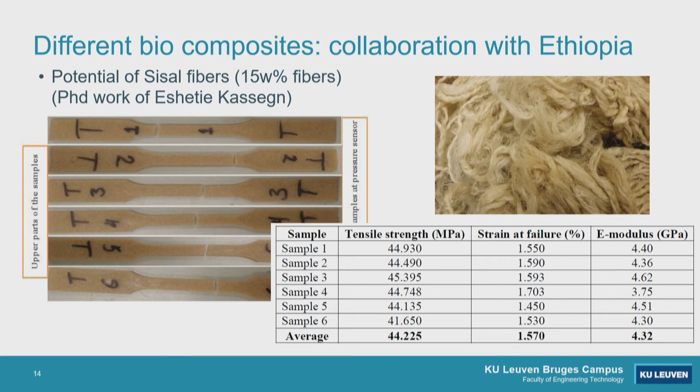If we look at properties, we end up with an average tensile strength of 44 megapascals, really brittle behavior, only 1.6% elongation possible, and an E modulus of 4.3 gigapascal - only a slight improvement compared to the neat PLA. Of course, the idea was also to use a plasticizer to avoid the too brittle behavior of these materials.

What is also checked is the water uptake as a function of time. If we have the pure PLA, we can compare it with the different amounts of fibers, and you can also see it's really sensitive to water or humidity.

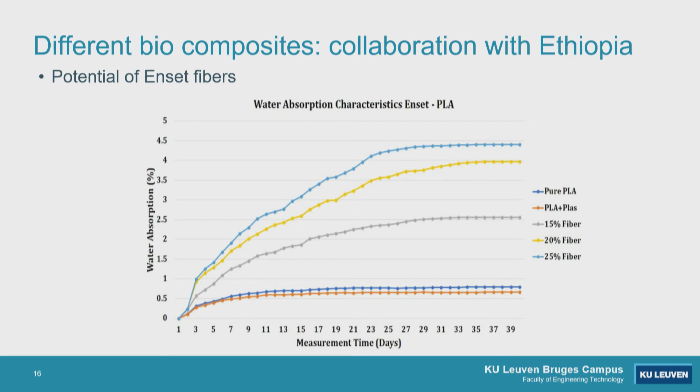So what is the potential of this Enset fiber? You can look for a kind of optimum percentage of plasticizer, depending on the application, to tune your combination. Also, as stated before, adding all these additives or strange components into your PLA can modify your crystallization behavior, which of course also influences the whole chemical behavior of your material.

If we simply compare them, this is a story which fits well to local processing flax companies, and we end up that flax has the best performance, or the broadest applicability in certain applications. So you can develop different things, but still a lot has to be developed. This PLA for sure is a brittle matrix, so to use it as a pure matrix material is challenging.

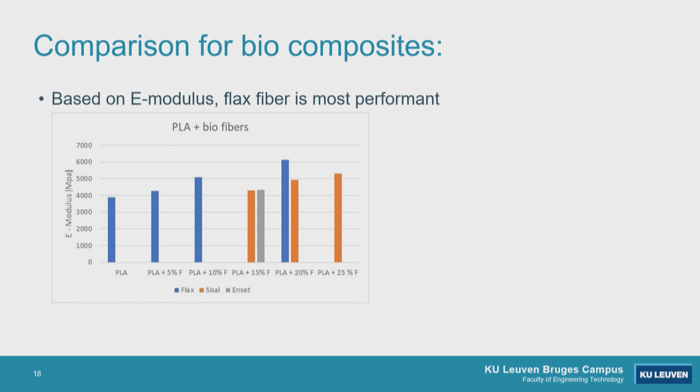Some conclusions: for sure there's lots of interest in these fully bio-based composites, trying to understand what's going on and trying to predict it, not only doing trial and error on equipment, but trying to understand what's happening inside numerical simulation tools. That's challenging for us.

Multi-scale fiber properties are challenging, because it's not only pure fibers which are added inside. Sometimes you have a composite inside a composite, and trying to model this in a mechanical way is challenging, since it's not written on the fibers what's the amount of fillers, what's the amount of fibers, and what's really in there. Adhesion with thermoplastic matrix is also challenging.

Polyolefins are not the best thing to be glued. Also, controlling this short fiber length is challenging, so compounding at large scale is challenging. And of course, not something the industry wants is variation of properties; polymer processing industry is not too much in favor of that. It seems, and it's already proven this afternoon with flax fiber, there is a lot of research going on in flax fiber, but ending with this slide, it seems there is still a lot of things to be investigated and researched in collaboration teams.

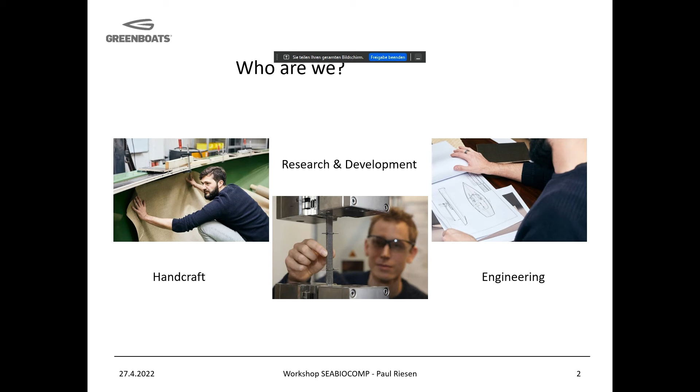Who are we? We are located in Bremen, in the northern part of Germany, a small team of handcraftsmen, and some engineers who do the research and development. That's for example from my side, I coordinate our research projects, and we have a small engineering team focusing on the materials but also doing the calculations or FEM analysis, and if we have a laminate schedule, we also need to draw the laminate schedule and so on.

What do we do? We are specialized on structural components. That's our main focus, in the maritime environment and also beyond. And the normal way to look at such a product is...

To take the price and the performance into account, and we created a third axis measured by LCA analysis, and based on our material database with different material combinations, we are able to do also small steps if the customer is not able to pay the highest price. We are also not dogmatic - if a small step for sustainability is good for us, that's how we work. We try to find the sweet spot for each customer.

I would like to talk to you today about the challenges and opportunities we are facing. There are some words like bio content, and some other topics like recyclability, or the high level of processing quality needed on our production side, the price, which is still a problem, and the environmental relief effect, which is our focus to have as much as possible.

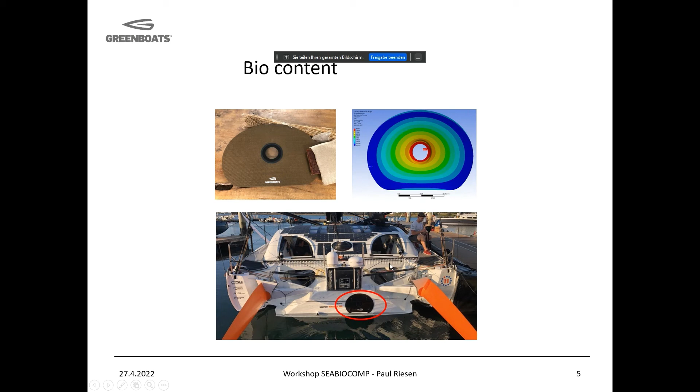Why did we manage to do so? Of course, because we had the handcraftsmen who were able to build exactly according to what I calculate in theory, and of course the optimization tools were quite helpful, but also the low density of the flax fiber. So this hatch is made out of flax fiber and bio-based epoxy resin, and is now cruising on the ocean.

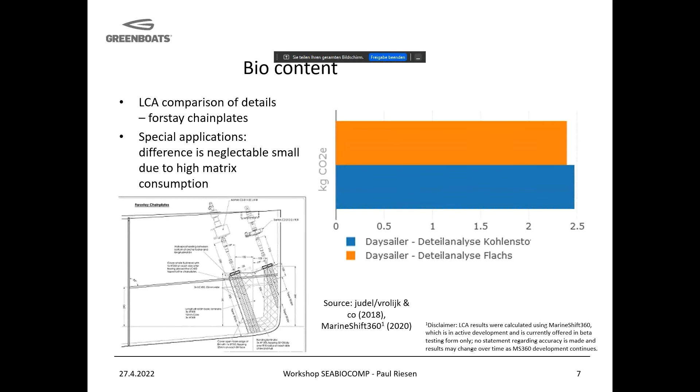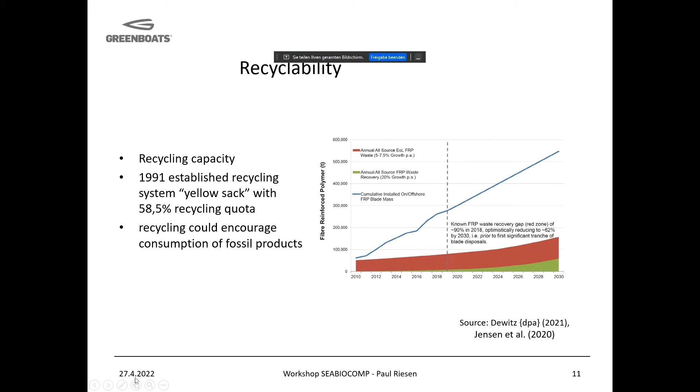So maybe I won't concentrate on moisture, mechanical performance, and resource consumption. Recyclability too, since there's not much time left. But what's important to say is that over the last 10 years...

And within the next 10 years we need to close the cost gap. We believe in a future where this market failure is overcome, where sustainability is priced into products and services. But meanwhile we need to focus also on price, to have really big environmental impacts or relief.

This is supported by bottom-up pressure from the streets and top-down pressure from the government. Our way forward now is to build up panels, to bring sandwich panels to an industrial level, because with such a panel it's easier to have one product.

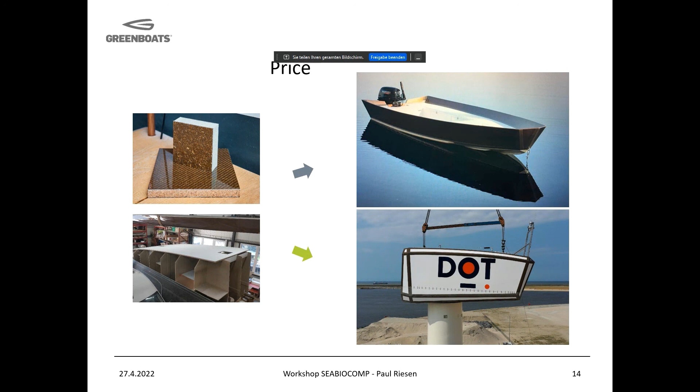So these numbers are for the whole of Europe. The boat building industry, or marine industry, due to the corona crisis, is sold out, so there's a lot to do and a lot to replace, because until now only a few boats and other parts have really been replaced. So I think for all of us there is a lot to do.

If there are questions, feel free. And yeah, thank you very much.

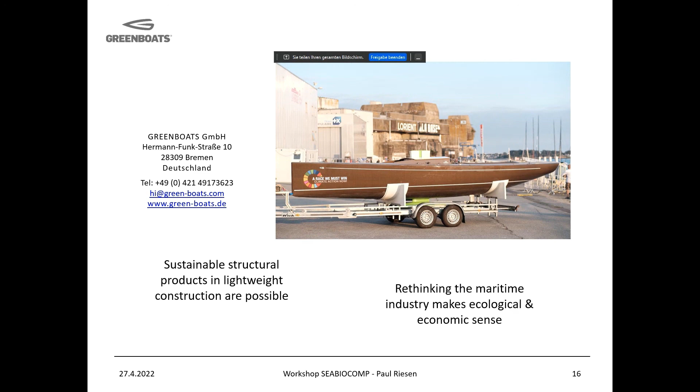I see no hands raised. Do you think... I have one question, yes?

Given the closeness of the life cycle assessment for carbon and flax, and the fact that you've only used a single database, MarineShift360, where it's not clear where the data is coming from, it could be that a different package gives a different priority.

Yeah, that is true, but we are partners for this Marine Shift data, for this MarineShift360 tool, and we know also where the data is coming from.

For example, which is a big problem for the EcoInvent database, you find a paper for flax which uses, how do you say it, retting - I don't know the English word - where you put the fiber in a water basin, or in France you just leave it on the field. So they used a paper, or still, the EcoInvent database relies on a paper where in India flax is produced and put in a water basin at high temperatures. Of course if you compare this with the production method in France, you can't compare these numbers, and then you get quite high impacts if you use this EcoInvent database.